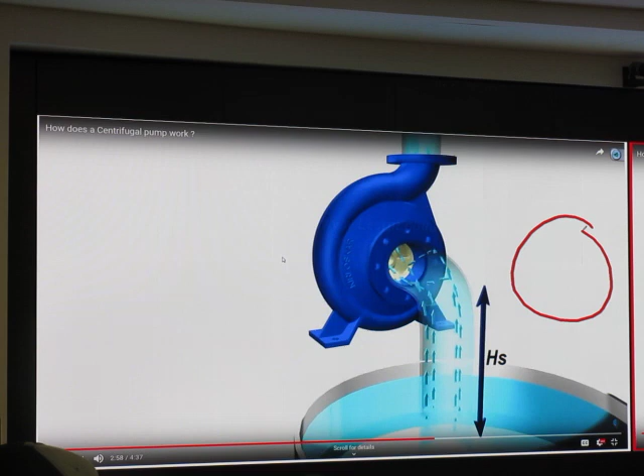No, because if I start dry, with nothing inside, and I spin it, it doesn't do anything, right? The pump doesn't pump air, it pumps liquid. There's a maximum suction head a pump can have. Careful pump selection is required to avoid the problem of cavitation.

Careful pump selection is required to avoid cavitation, and we have this NPSHA and NPSHR.

Who wants to help me with that? Net positive suction head. What about A? Available, okay. NPSHA is net positive suction head available. NPSHR is net positive suction head required. We will talk about it more in the actual lecture, to avoid the problem of cavitation.

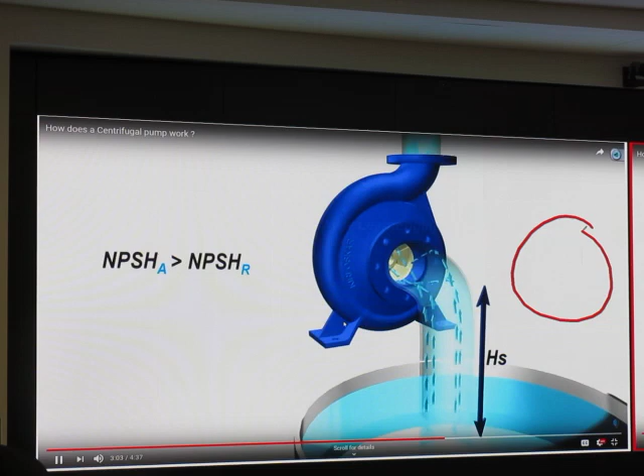Current impeller type is enclosed. Semi-open and open impellers are also in use depending upon application. If the working fluid is cloggy in nature, it is preferred to use an open kind of impeller, but they are slightly less efficient.

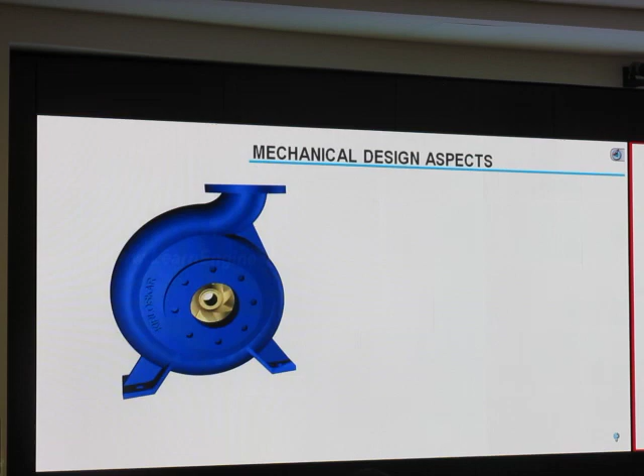Mechanical design of a centrifugal pump is always challenging. A shaft is used to connect the impeller and motor. Since water pressure inside the casing is huge, a proper sealing arrangement is imperative in arresting water leakage through the shaft casing clearance. A mechanical seal or stuffing box-based mechanism is used for this purpose.

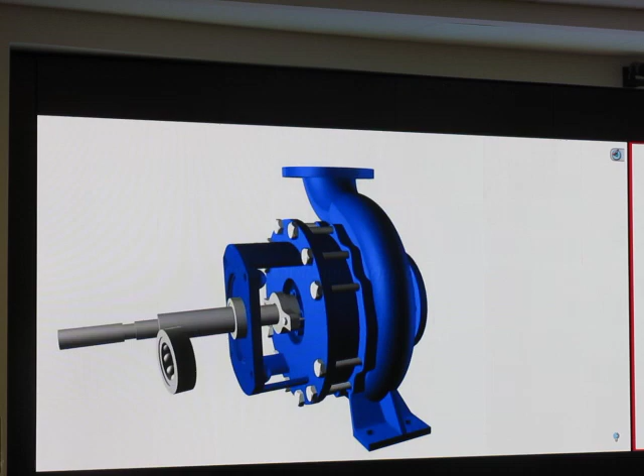The impeller is mounted on bearings, but at the suction side of the impeller it is not advisable to fit a bearing since it will block the flow. So bearings have to be fitted at the other end. This means the impeller is mounted like a cantilever. For high flow rate pumps, a bearing housing with cooling oil is necessary for improving the life of bearings.

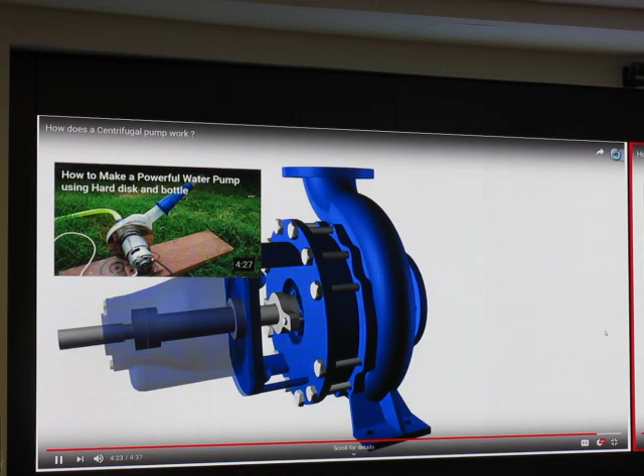Okay, sometimes there's cooling oil for those bearings. Okay, this type of pump, is it centrifugal or positive displacement? Centrifugal. Okay, very good, because it says so over there, right?

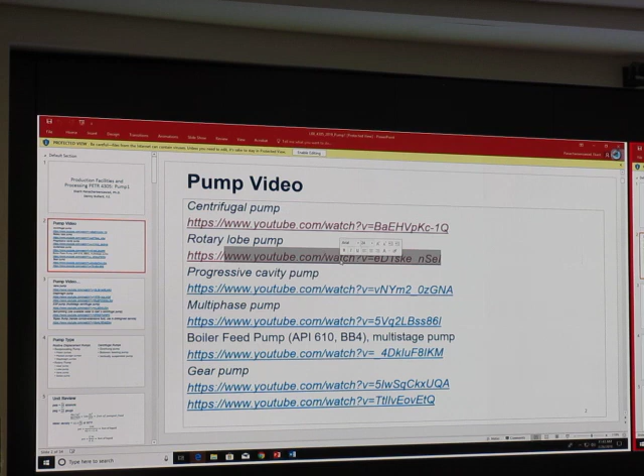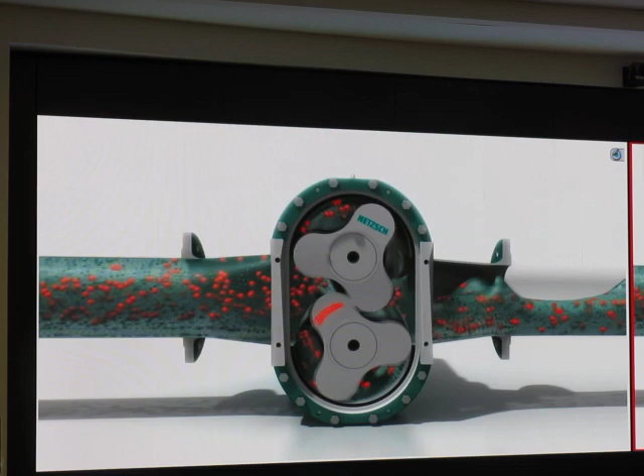Next one, rotary lobe. Okay, this is rotary lobe. Is this centrifugal type? Positive displacement. So it mechanically moves the volume forward. When it comes in, it goes to the side. This type of pump is called a rotary lobe pump, designed for a wide range of temperatures and pressures, and is among the most extensive, heavy-duty shaft-sealing designs available.

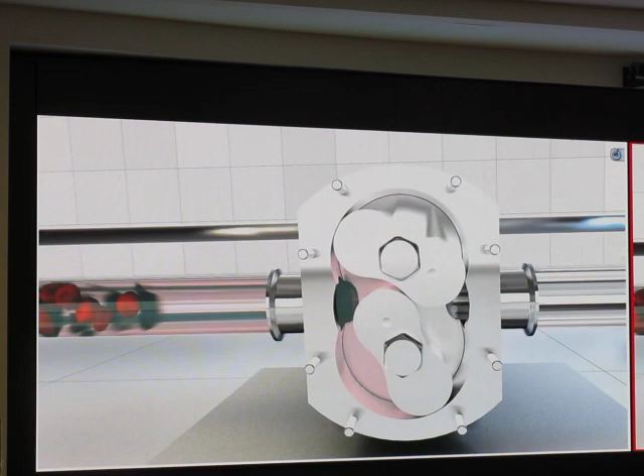Okay, this is another rotary lobe. Let's take a look at the inside. Okay, we have flow. It's the best solution for pumping liquids containing solids with minimal damage. For improved volumetric efficiency when transferring low viscosity liquids, the bi-lobe rotors are also available in non-galling alloy. This allows closer pump head clearance and reduced slip.

So this thing can handle solid particles, right? But it could get stuck. Every time we have a mechanical seal, anytime there is a mechanical seal and we have solid particles, it will create wear. Think about this: if I have a small sand particle and that small sand particle gets into this part, it scratches the surface, right? It creates wear over time, it won't be good. But this can actually handle a little bit of solid particle.

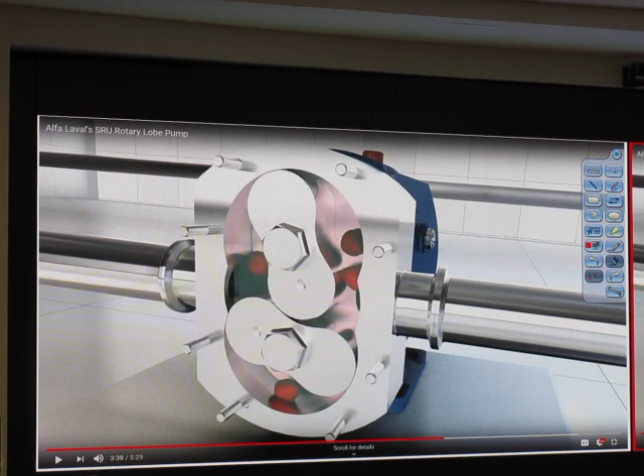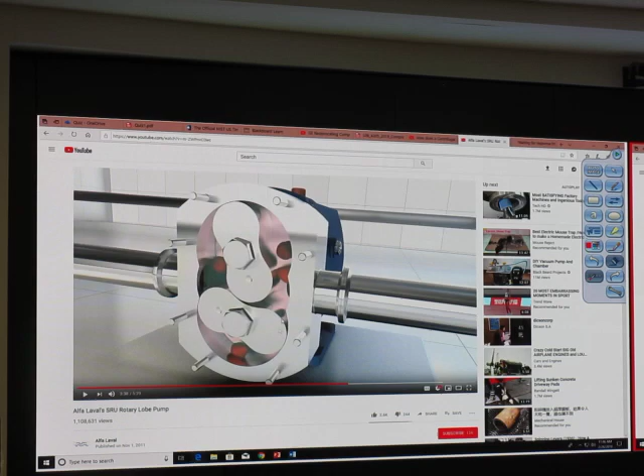So now we know rotary lobe and centrifugal pump. Let's take a look at another one, progressive cavity.

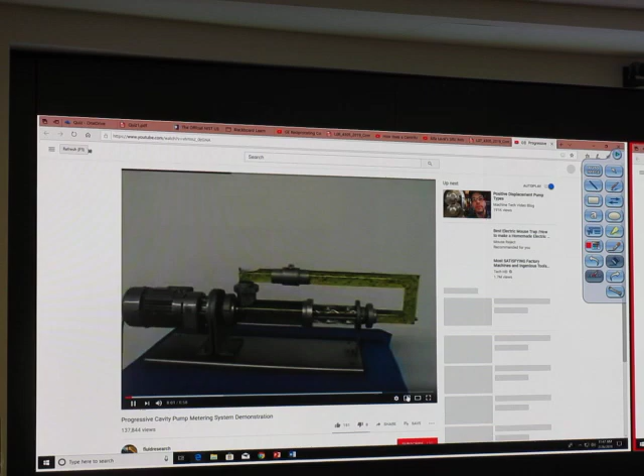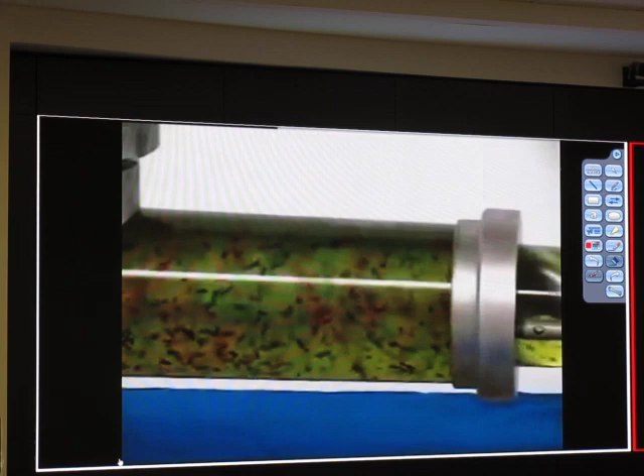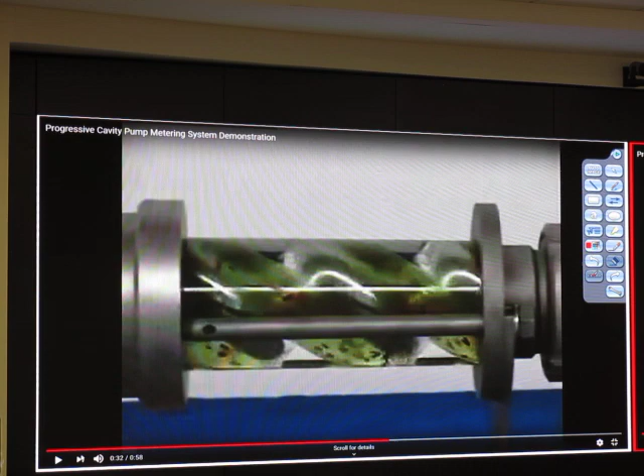I think it's kind of fun, right? So progressive cavity pump can handle solids, okay. It pushes the liquid volume forward mechanically by spinning that screw. Sometimes they call it a screw, but okay, we have another type of screw, so just stick with the progressive cavity pump. This motion pushes the liquid forward mechanically. So this is PD type, okay, this is PD type.

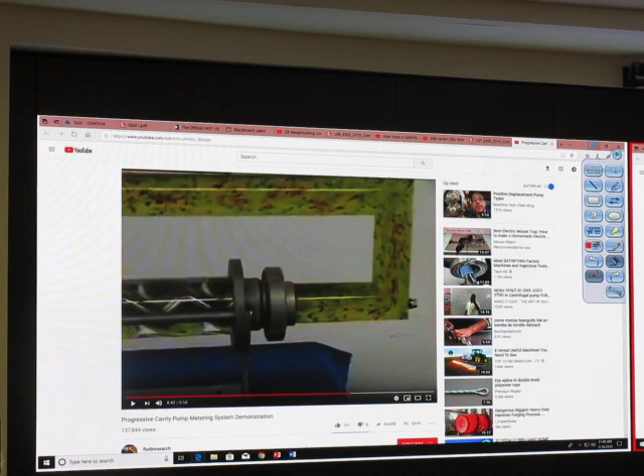Multi-phase pump. For over a century and a half, Flowserve has pioneered virtually every significant advanced development effort. It's the MP1, a double suction, twin screw positive displacement pump, specifically engineered to handle the most aggressive challenges in multi-phase oil production. The MP1 readily accommodates rapid changes in oil viscosities, water cuts, and gas volume fractions, all of which vary over the life of an oil field.

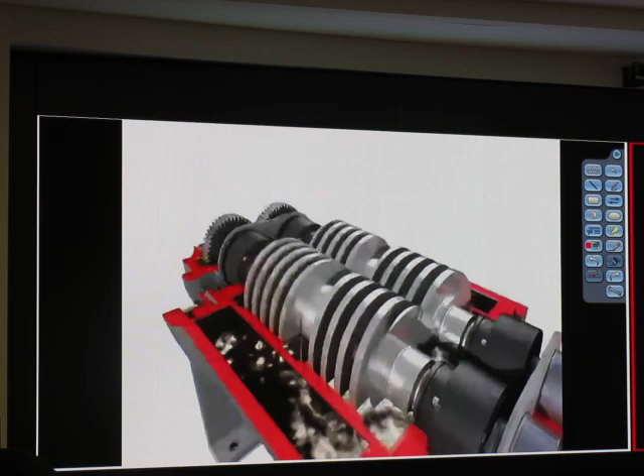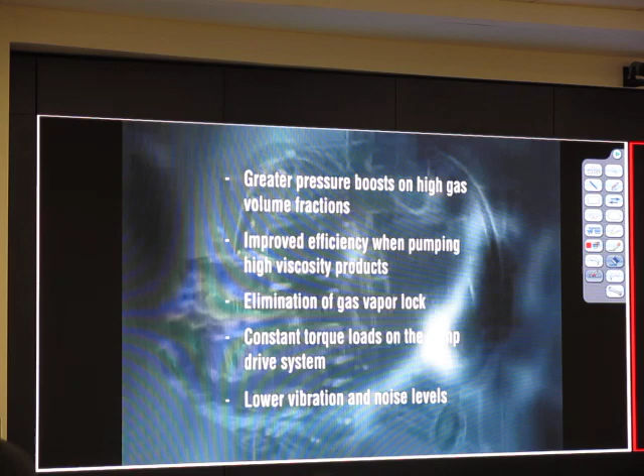Its positive displacement design inherently offers several operating advantages over other pumps, including greater pressure boosts on high gas volume fractions, improved efficiency when pumping high viscosity products, elimination of gas vapor lock, constant torque loads on the pump drive system, and lower vibration and noise levels. The Flowserve MP1 is built with a one-piece integral rotor, offering greater shaft strength and high torque handling capability when compared with multi-piece rotor designs.

Robust roller bearings at each end of the shaft support full hydraulic loading, even at 100% gas operation. This is called a screw pump. The previous one was not a screw type, it was progressive cavity. So we have this type for the compressor, the screw compressor, and a similar thing for the screw pump.

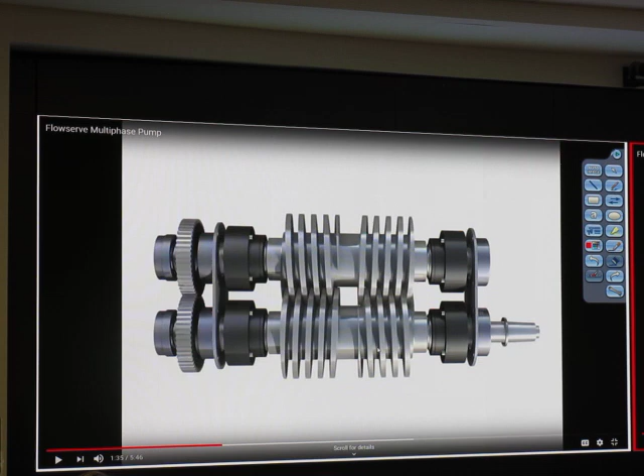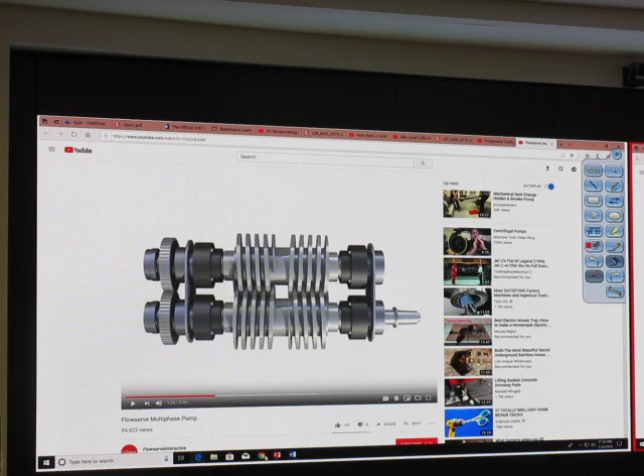This unit is a multi-phase pump. It claims to be able to pump both gas and liquid. It will be more efficient if we just pump liquid alone. Okay, that's the multi-phase pump. And the next one, okay, multi-stage pump.

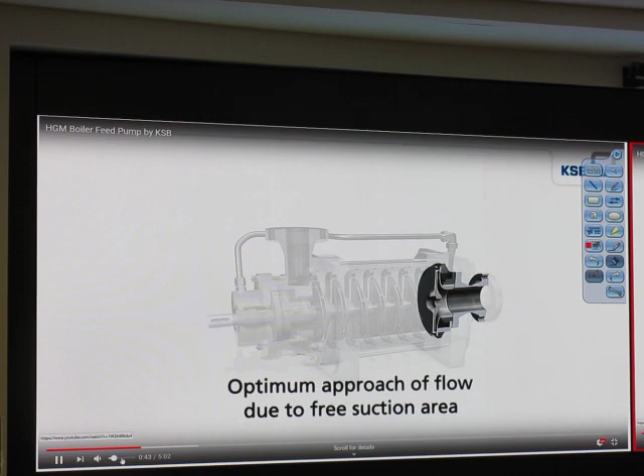Let's take a look at the multi-stage pump. How many stages is that? Alright, we have that number of blades. You see the number of impellers inside? So when it goes from one impeller to another, into another, they put it in series. So when we put pumps in series, does that increase the flow rate or the pressure?

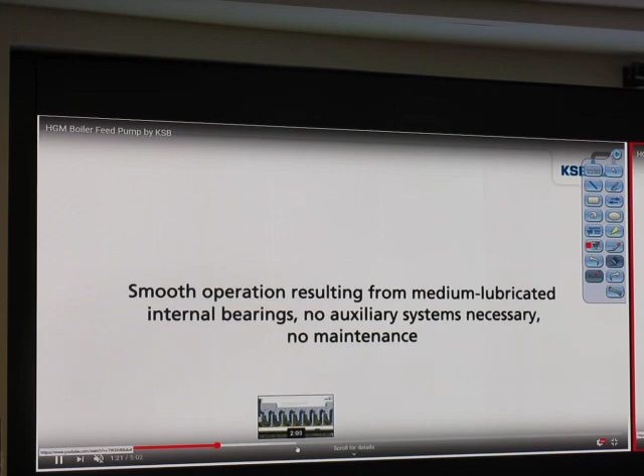Pressure. Does it increase the flow rate? No. Putting a centrifugal pump in series increases what? Pressure, not flow rate, okay. So they put this pump together in series, and the flow, okay, it comes in, goes to the first stage, second stage, and third stage inside this.

Okay, you see the flow direction? So when we have multiple of them in series, this increases the pressure a lot.

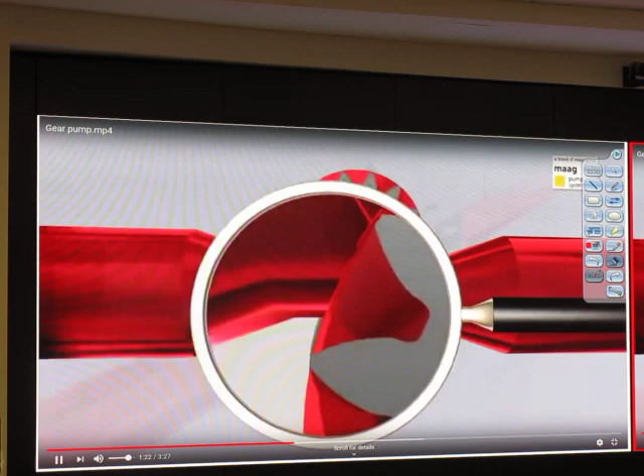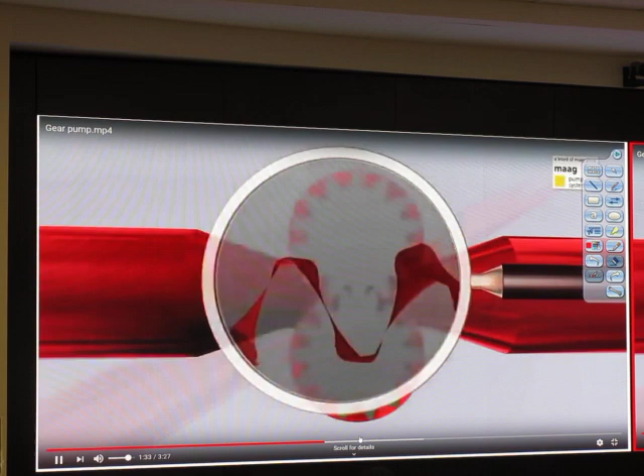Alright, the next one is about the gear pump. Okay, gear pump is another type of PD pump. It has a gear, it looks similar to that lobe pump. Okay, you have flow coming in. Okay, flow goes within this gear and coming out, so it goes around the pump like that and comes out on that side.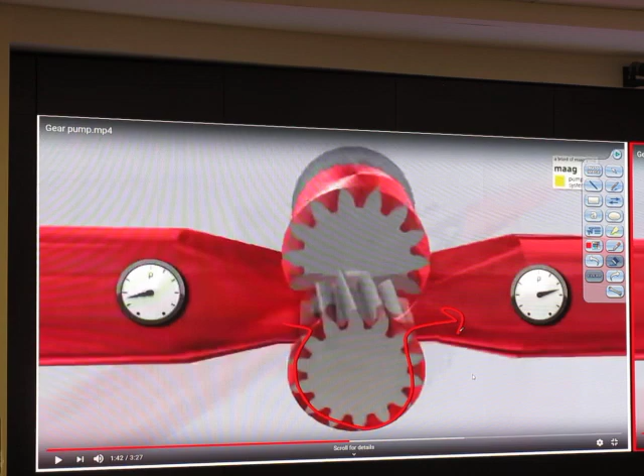Bubbles, yeah, if I spin too fast. So if I spin too fast, this means I decrease the pressure very quickly. I try to deliver faster than it comes to that point, so I may break it apart and create a bubble. So if I spin too fast, the pressure may go below the vapor pressure and make bubbles come out. Okay, so that is a gear pump.

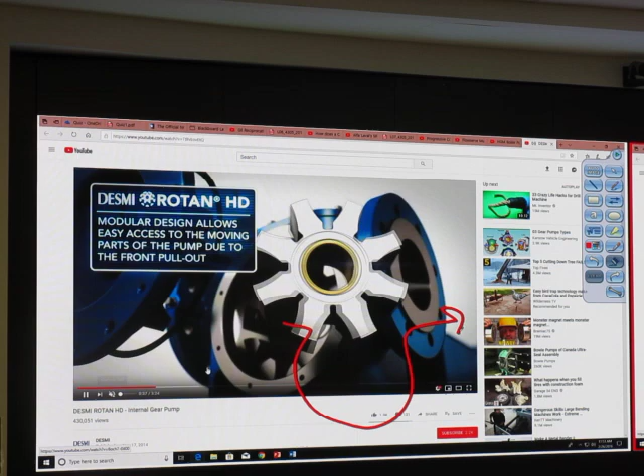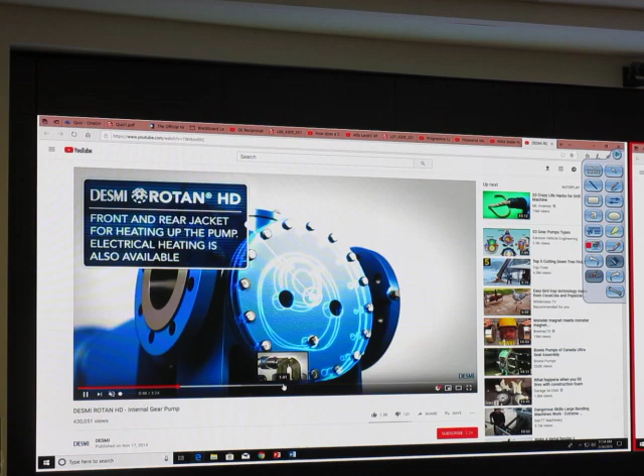Gear pump is a positive displacement type. Another video for the gear pump. Okay, inside there's a gear. So let's see how it works. So it flows around the gear, okay, like the previous one, it goes to the side.

So gear pump, is that the positive displacement type? Yes, okay. Vane pump, you remember the vane compressor? Did you have the vane compressor? Okay, what type of compressor is good for vacuum? Do you still remember? Good for vacuum, or at least read it for yourself. Find out, okay, and maybe you can answer it next time.

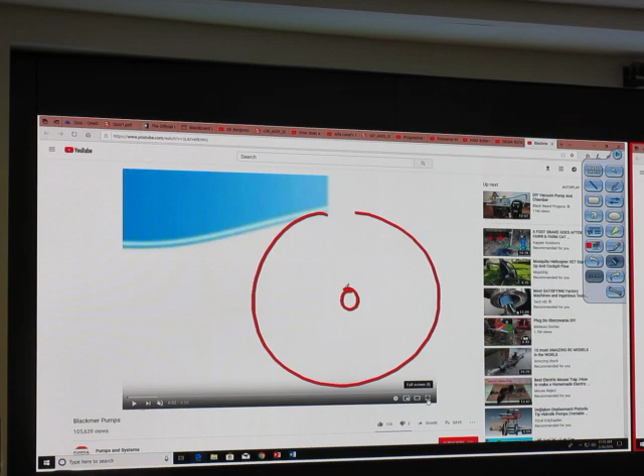Why is the gear pump a PD pump? Gear pump, okay, centrifugal pump works by converting kinetic energy to pressure. Okay, the way a centrifugal pump works, you see it's coming in the middle, and it goes out to the side, right? So when it goes out to the side, it comes in the middle and flows out radially.

So when it flows out radially, the cross-section area of the flow goes up, right? Close to the eye it is less, away from the eye it is more. So when it flows with more cross-section area, the velocity goes down. And when the velocity goes down, gradually pressure goes up. Okay, that's how it works in short. We will talk more about it, of course.

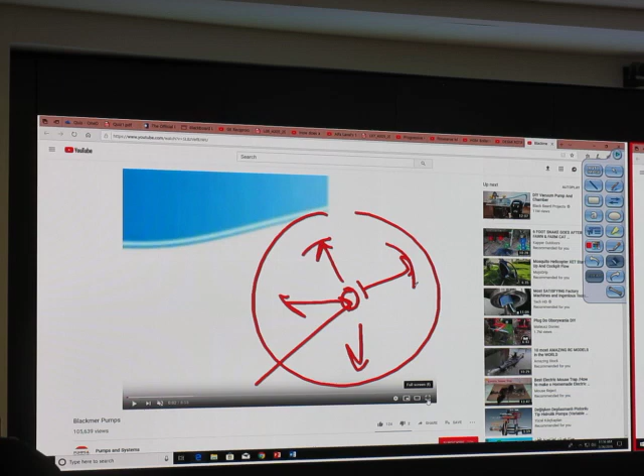Gear pump is physically, mechanically moving the volume of fluid forward. It doesn't use a spinning motion to convert kinetic energy to pressure, it's not that. It moves the fluid volume around the gear to the discharge side. When it mechanically moves the fluid volume, that is the positive displacement type of pump.

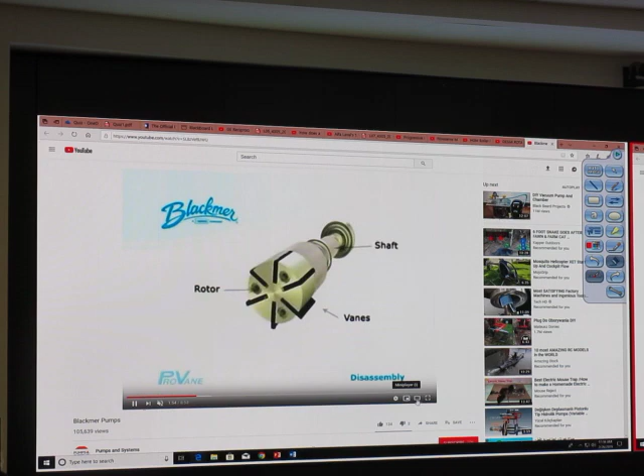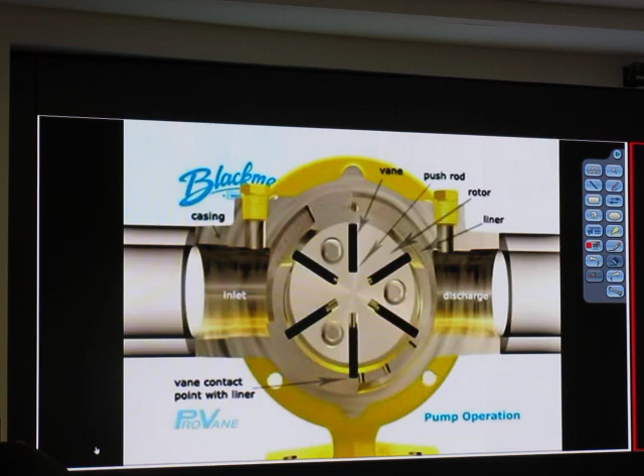So vane pump, we have vanes. Is there anything? So you see the sliding vane, the black part. We have inlet from the left and discharge. Okay, it's about to spin. Now, so you see this vane, it's coming out. Sometimes it goes back in, sometimes it's coming out, okay, sometimes it goes in.

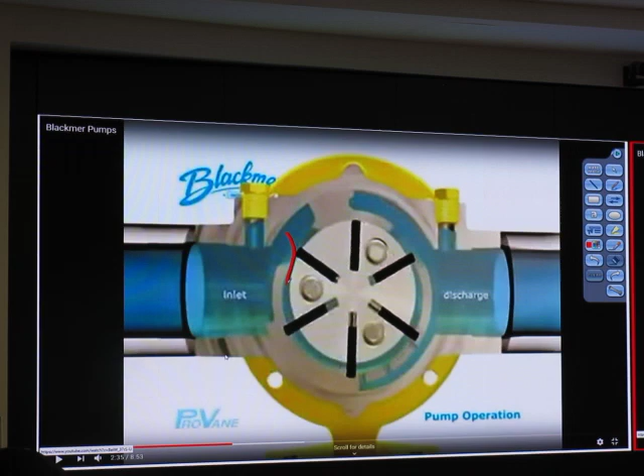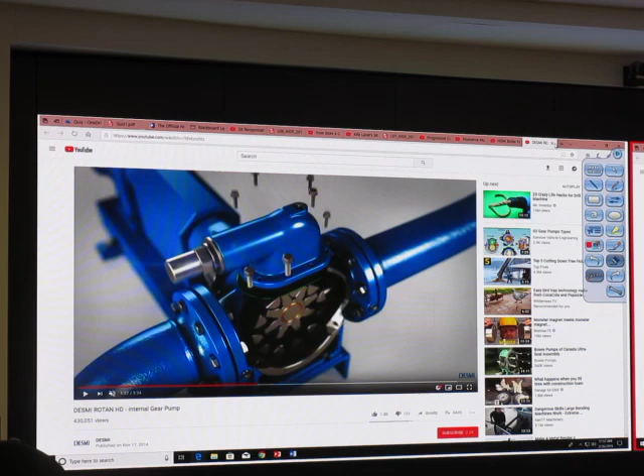The fluid moves around the vane like this, okay, moves from here to this side. So it's like mechanically pushing the volume forward. So this time, even though it's spinning, it's not the centrifugal type, it's a positive displacement type, okay. There's the vane pump, and the diaphragm pump.

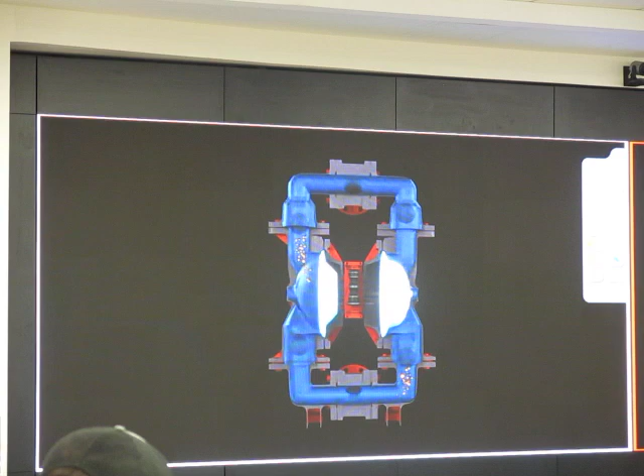A diaphragm pump may be good for solid pipe, and you see the PX1500 76 millimeter 3-inch advanced aluminum pump. The liquid chambers are alternately filled and emptied by fluid that is drawn through a common inlet and discharged through a single outlet. The diaphragms in each chamber are linked by a single shaft, allowing them to move in unison.

The air valve directs pressurized air to the back of diaphragm A. This begins chamber B's suction stroke, which starts as diaphragm B is moved toward the center of the pump, thereby creating a vacuum in chamber B. Atmospheric pressure then forces fluid into chamber B past the inlet ball valve.

When the pressurized diaphragm A reaches the limit of its discharge stroke, the air valve redirects pressurized air to the back of diaphragm B. This begins the discharge stroke of chamber B. The hydraulic forces developed inside of chamber B force the inlet ball onto its seat and the discharge ball off its seat. This condition allows fluid to flow through the pump discharge.

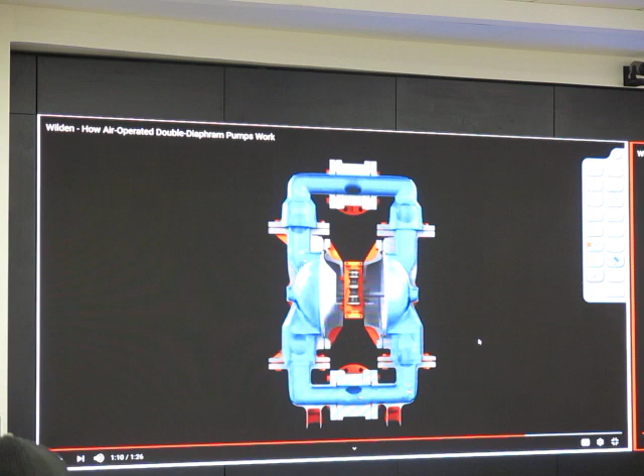Is it clear enough? We have the ball that can move up and down a little bit, and the middle part redirects the air pressure. So if air pressure goes to one side, the diaphragm moves one way. When it moves the other way, it keeps pumping, and then the fluid goes up. Okay, it physically sucks it up because of the movement of the diaphragm. So this is a positive displacement type.

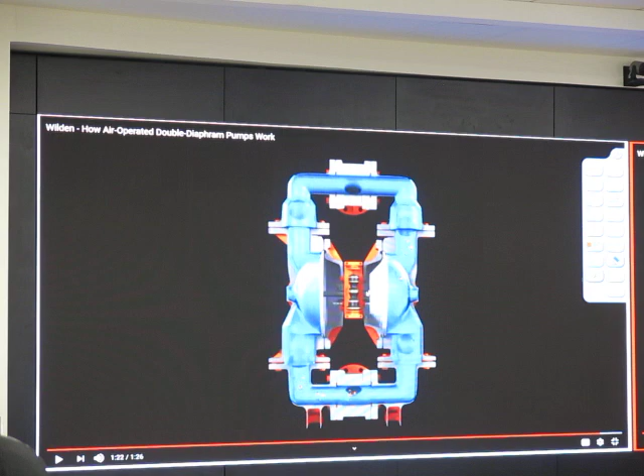The process occurs in the opposite chamber, constituting one full cycle. The pump will continue to run until the inlet air supply is interrupted or discharge pressure rises to equal that of the air supply. So when the diaphragm moves, it kind of sucks everything up. Good. That is a diaphragm pump, and that's a positive displacement type.

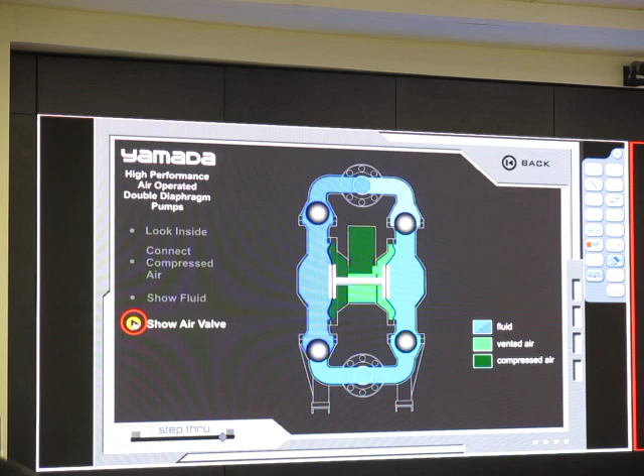And we have another one. Okay, this shows the pressure inside. Dark green is higher pressure. And the way the fluid moves, when the diaphragm moves, the diaphragm itself pushes it out and sucks it in, because we have the ball to move up and down. That's how it works in short. Basically, it's another type of positive displacement pump.

ESP. What is ESP? Electrical submersible pump. What kind of pump is that? Several centrifugal pumps together, right?

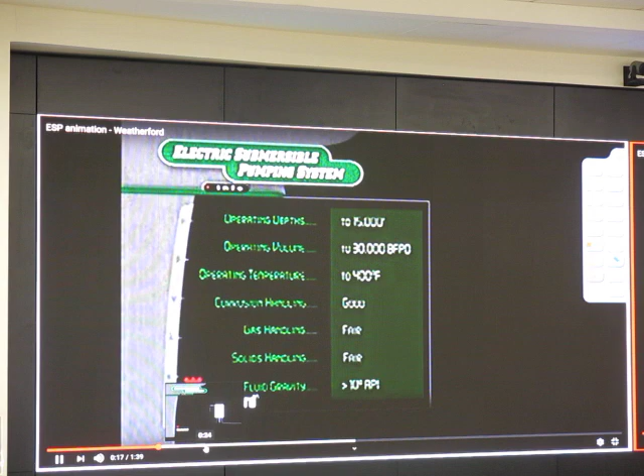I don't think the sound is relevant.

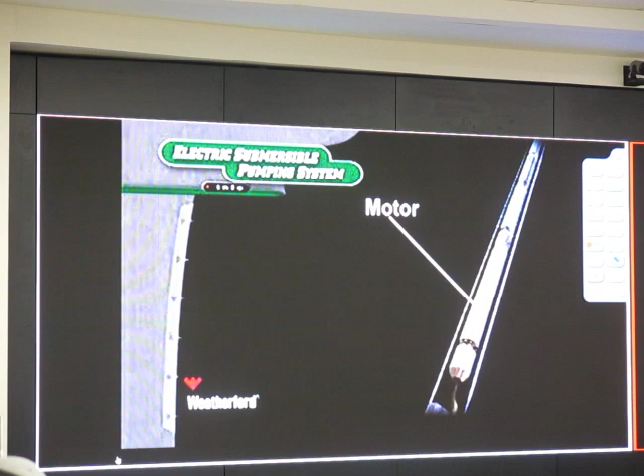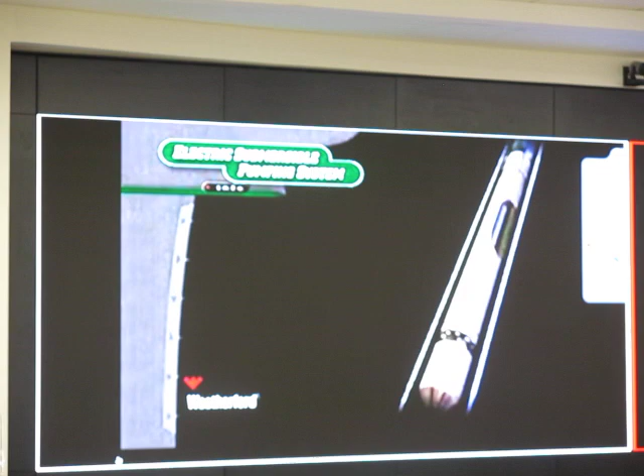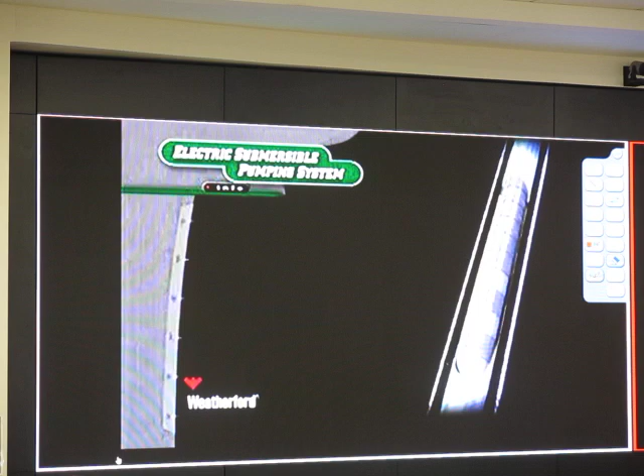Okay, here comes the latest stage. We separate some gas out first. And look at that. How many stages? Many, right? From what I see over there, it's 1, 2, 3, 4 at least. It's a multi-stage centrifugal pump put in series. A multi-stage centrifugal pump put in series becomes an electrical submersible pump, ESP. So is ESP PD type or centrifugal type? Centrifugal, okay? In general, it's centrifugal type.

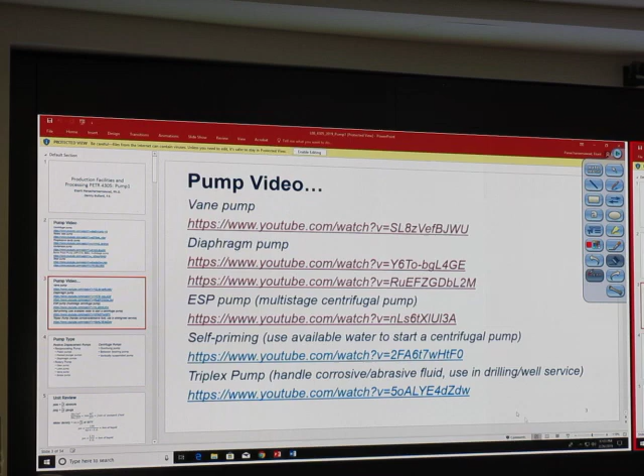Self-priming. Many of you may already know priming. What is priming for a pump? It's filled. It primes itself. So for a pump that can do self-priming, can it start dry, with nothing in the pump? Okay, self-priming. Let's take a look at how it works. I don't think we can start it dry. We need something inside before we can do anything with it for self-priming.

This video is to inform and instruct on the operation and troubleshooting of self-priming centrifugal pumps. Before we get started, let's review the piece of equipment we'll use for our priming demo. It is the glass-based pump. It consists of our very own 11.5 A3 E1/2 single-phase unit, driven by a variable frequency drive. It is the exact same 11.5 A3 that we build on a regular basis here at Gorman-Rupp, with one small exception. We have sectioned the volute casing.

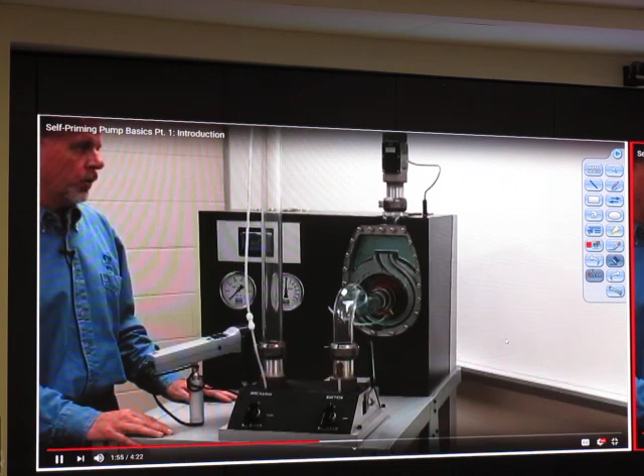For those of us that are familiar with self-priming centrifugal pumps, we know that we must first fill the volute with water. May not be completely full, but it has to be something inside. If you start dry, it doesn't work. We can now start the pump. So initially there's some liquid inside, right? Inside of the pump during priming.

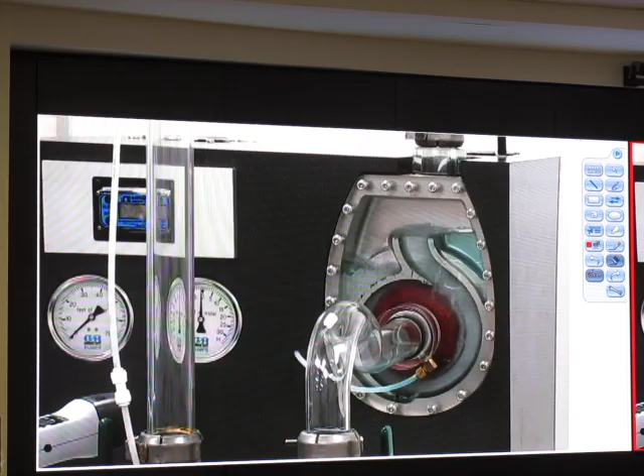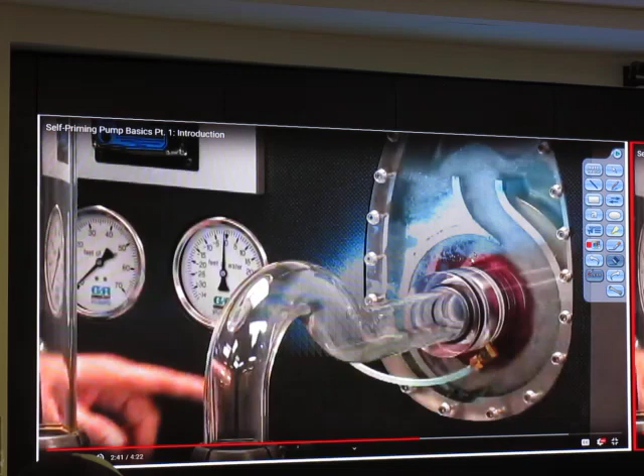After we fill the volute casing with water and we energize the pump, the impeller turns in a counterclockwise rotation. The initial prime of the pump is slung through the volute on the ever-increasing channel into pressure. You see this channel? Water can come back down. That's the key, okay? Self-priming is like a small separator. It allows liquid that comes out to fall back down over there.

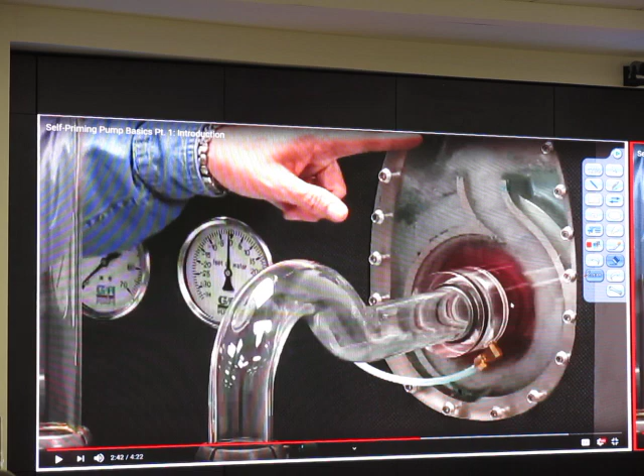So it creates a seal, like a vacuum. If I start a self-priming pump with no water, no liquid inside, it spins, it doesn't do anything, okay? It needs some liquid inside first.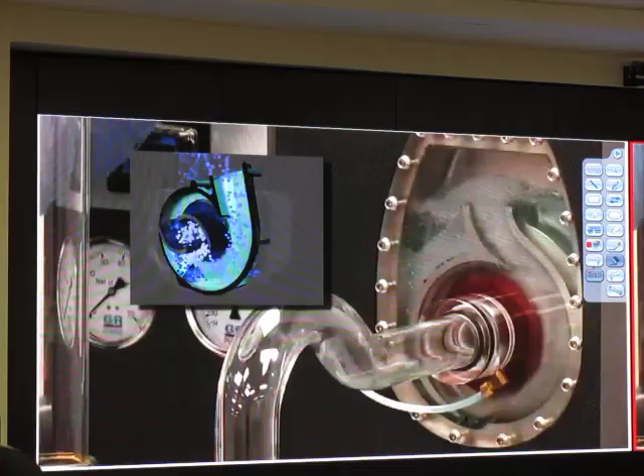Inside this discharge chamber, the air and water separate. The heavy water falls back down through a recirculation port, and the air is then evacuated through an open-ended line or through an air release device. All the while that we recirculate the water inside the casing and remove the air from the top, we create a low pressure at the eye of this impeller.

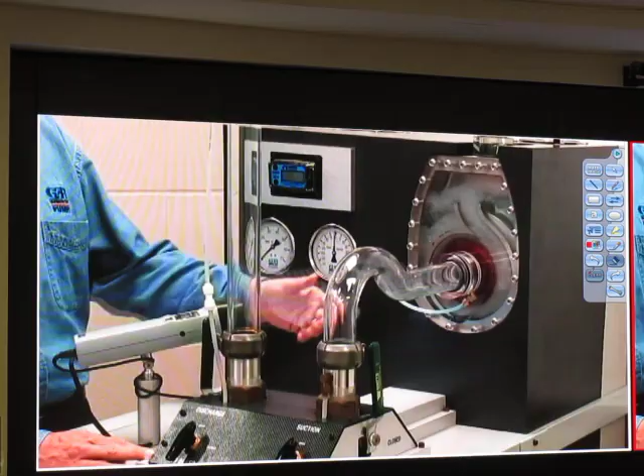Due to differential in pressure, atmospheric pressure that we live around every day is higher than the lower pressure created at the eye of this impeller. Due to that differential in pressure, atmospheric pressure outside begins to force liquid up the suction pipe.

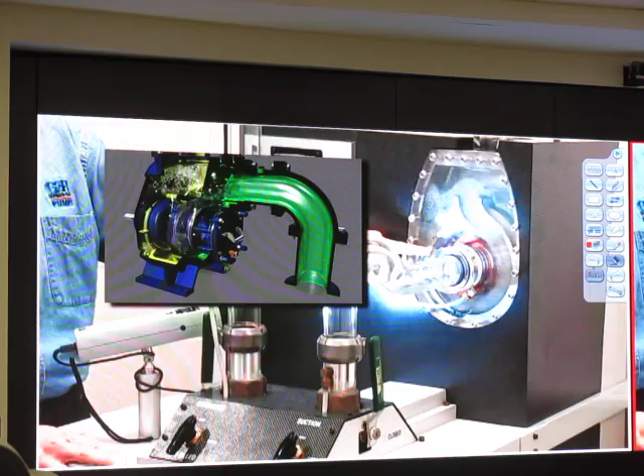As liquid moves up the suction pipe, it pushes all the air ahead of it into the volute casing where it is handled through the recirculation process. Again, the air is handled off the top and the heavy water recirculates back down into the volute scroll area.

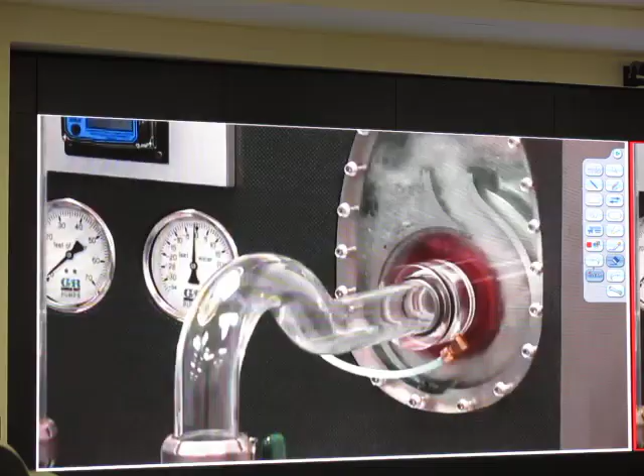I'll close this valve right now and create a suction line capable of pulling a vacuum. Ahead of it moves the air, pushes it into, handles it through the recirculation process - see the water coming out? And once the water arrives, the pump then goes to complete operation.

For more information: self-priming for the pump needs some initial volume of liquid. It cannot start dry.

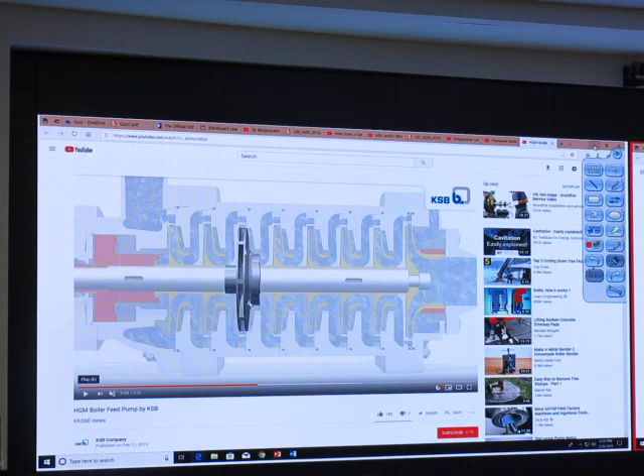Alright, another self-priming video, triplex pump. This one is new. Triplex pump handles corrosive, abrasive, drilling well service. What is a triplex pump?

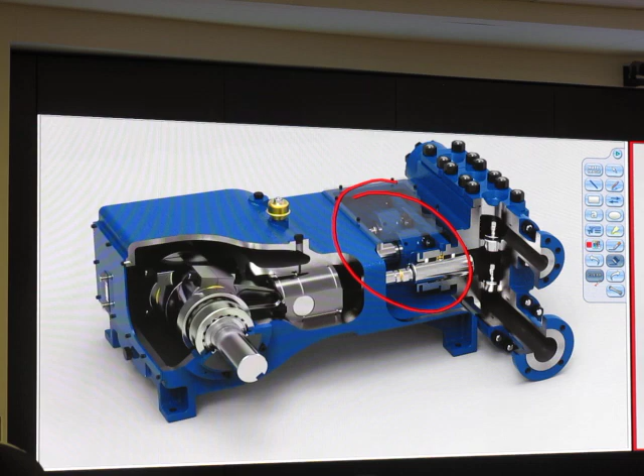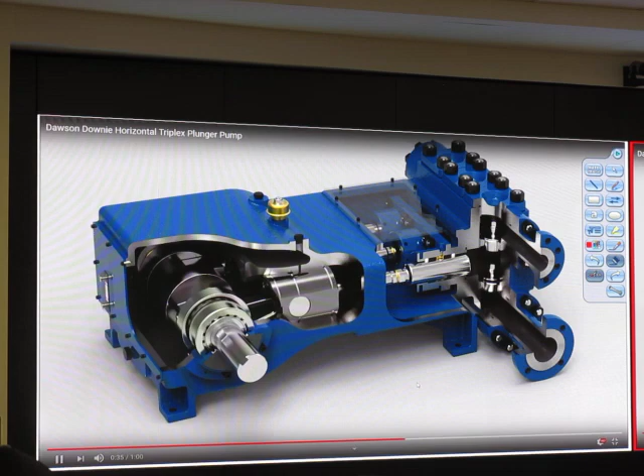You see that 3-cylinder? When I do one turn, how many times will it pump? 3 times, right? Is it 3 times? So you have 3-cylinder. So this is what kind of pump? PD or centrifugal? PD. Alright, that's a triplex pump. That's how it works inside.

What can I do with the exam? What do you think the exam will look like? I give you the picture and ask you, what is this? Just that. Is that easy? It's always easy when you come to class.

And we have everyone come today, right? Oh, Elizabeth. Elizabeth, she's sick, okay. So we missed one, just that? Alright. Tell her to watch the video, okay?

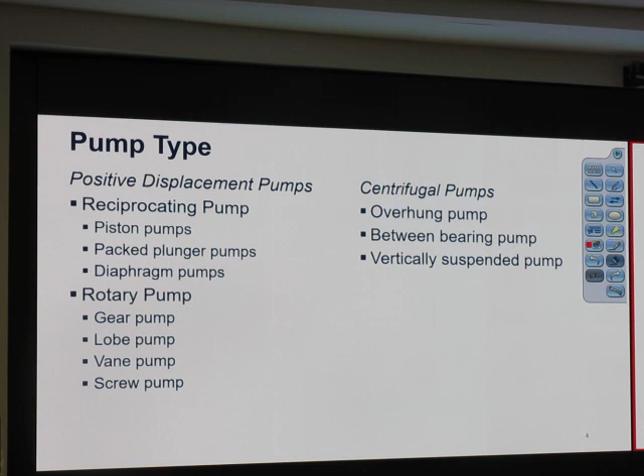Alright, type of pump. We have PD type. PD type, the full name is positive displacement pump. It can be reciprocating pump or rotary pump. Even though it spins, it doesn't mean that it's centrifugal type. Centrifugal type, we have different kinds of configuration: between bearing, vertically suspended, overhung pump.

Pump calculation: when we talk about pump, they want to know how many feet of water is the discharge pressure. They don't quite talk PSI, okay? How many feet of water can it pump? So this means I have to be able to convert from PSI to feet of liquid or feet of water.

PSI is pound per square inch. Convert inch to... density is pound per cubic foot. Multiply by 144 to change from inch square to feet square. Put water density over there. So here we can convert from PSI to feet of water. It is important that you know how to do this in the exam, if any. The formula is not given, you have to write it down.

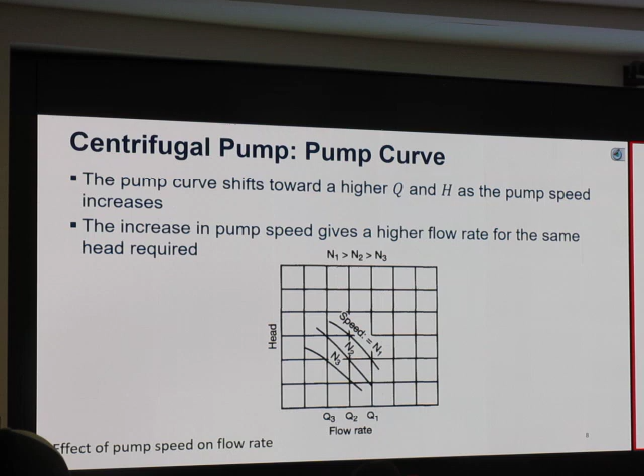Let me wrap it up because it's about time. So let's review a little bit, what is the content of the exam? The exam covers not this page, but this page, this page, this page, this page, and all the video. Okay, that is the content of the exam.

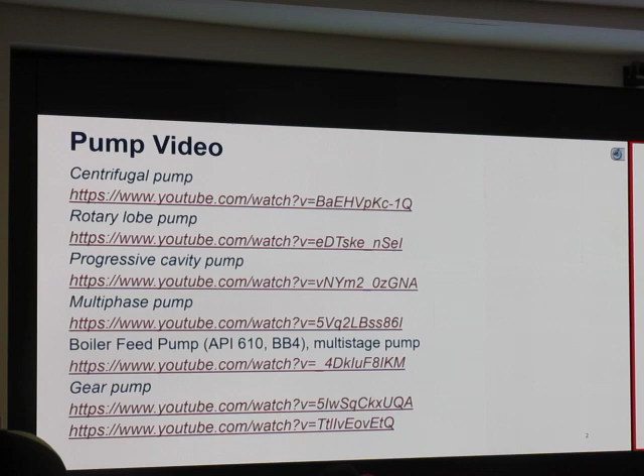The exam also contains an ethics part, the lab that you went to, the field trip that you went on. I have the facility I asked you to draw. At place number 1, do we put a heater treater or something else? You should be able to do it.

Okay, the field trip, draw the diagram, 20 points. Diagram according to the East Campus: how do we lay out the heater treater, everything. Very easy, right? You just went there. Come in with the separator, we have a bypass to the test separator, then it goes to the free-water knockout, then goes to the heater treater. Did you remember that? Watch the video, there's a video uploaded.